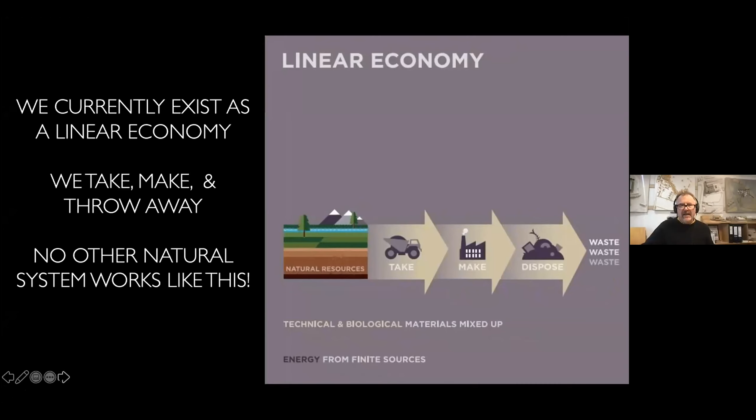We currently exist as a linear economy, where we take, make, and throw away. No other natural system works like this. Waste from one ecosystem is a resource from another. We're the only system that rocks up at a place, consumes, trashes it, and moves on, leaving devastation.

What we want to be talking about is a circular economy. In the human-focused circular economy, you've got the biosphere for all organic things where you grow stuff, make stuff out of that grown stuff, use it, reuse it, and as long as you don't make it toxic waste, it becomes compost for more organic things to grow.

Then we've got the complexities of the tech sphere, where a lot of the products we make cannot ever be compost. So that's the big challenge: designing things to be material stores for the future, material resources for the future.

This has been written about very eloquently by Michael Braungart and William McDonough in Cradle to Cradle, all about doing good, not less bad. That's a reference to sustainability, where unfortunately the phrase has been besmirched because it tends to be 'I will be less bad by 10%, I will reduce my consumption of something by 10%.' That's not going to save us.

Some of the obstacles preventing a mass take-up of circular principles: a lack of awareness of the benefits, no time to learn new ways—we just want to get on, we've got to build, haven't we? Not knowing where to start, and we're not always involved from the start, we being consultants.

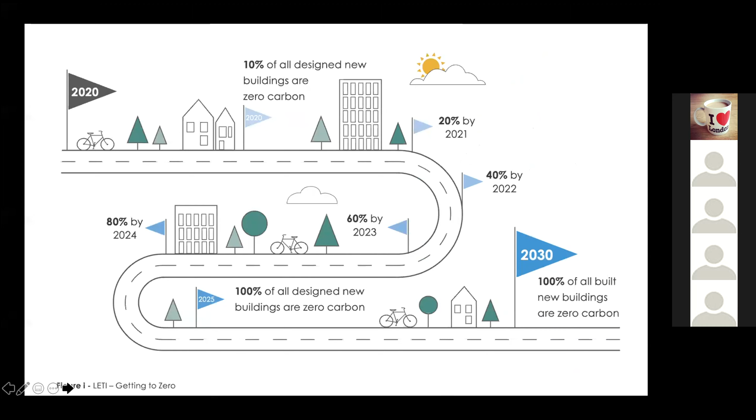We've got the climate challenge from the RIBA. We've got the amazing work of LETI and a carbon descent plan. So we've got a consensus out there, you could argue. We've got these networks, we've got the climate framework with this cross-industry action group initiative, looking at the curriculum in the academic world as well as practice across disciplines. We're sharing knowledge and working together, and we were not doing that two years ago.

People are writing about it. It's not going away. Reuse is the big deal, and that's part of a circular economy. And of course, 80% of today's built environment will still be with us in 2050, which is when we need to be at net zero carbon.

So why is it a big deal to start at RIBA work stage 0, strategic definition? Well, as Sophie Thomas said a number of years ago when working for the RSA, research has shown that over 80% of the environmental impact of products we use is determined right at the beginning. You've got to do it right at the beginning, or it's too late. It's very difficult if you don't get these ideas imbued and embedded from the start.

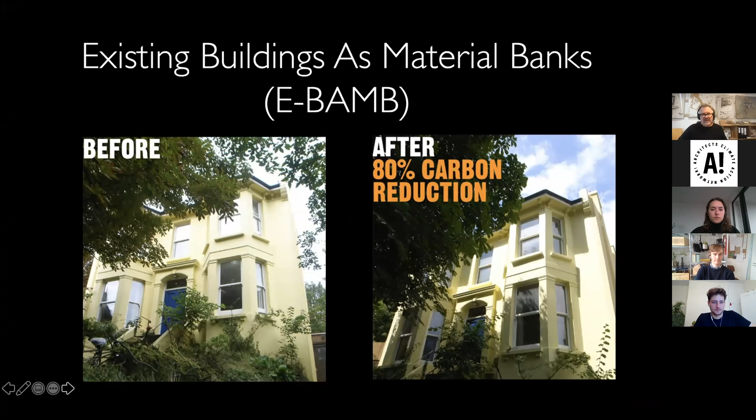So in the world of a circular economy, cities are material stores for the future. We are urban miners searching for new material sources to reduce our need for natural raw materials. We've got concepts such as Buildings as Material Banks, but you've also got E-BAMB, Existing Buildings as Material Banks. We do not need to throw anything away, we adapt what we've got.

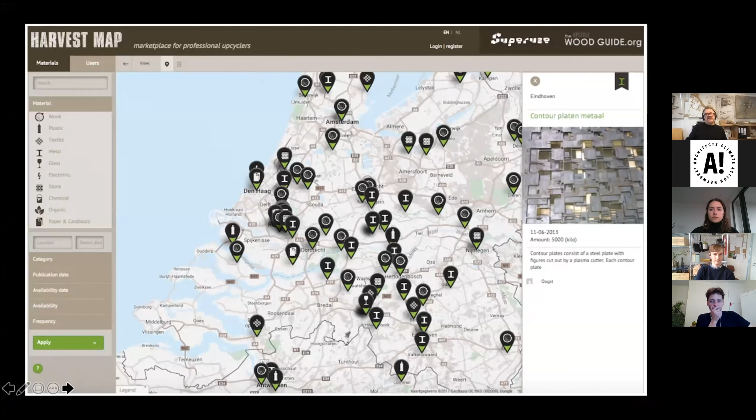We're beginning to get the digital tools and databases to support this. Superuse has famously started their interactive harvest mapping - this is in the Netherlands. This is one of their own harvest maps. They're scouting around looking for resources, which can also be human resources.

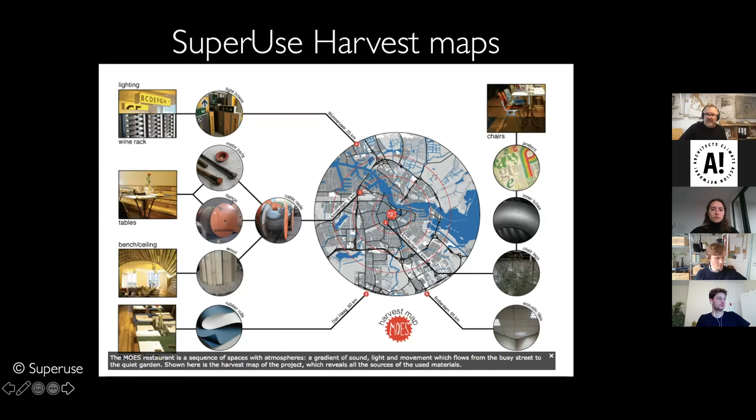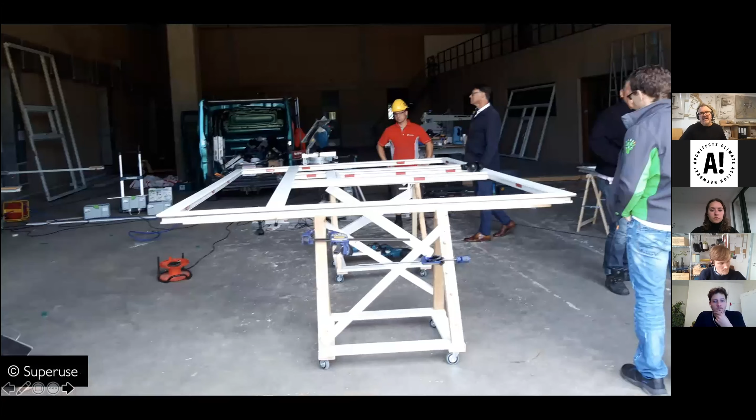And here's a recent building of theirs, an abandoned building at an airport - no great shakes really, but they're refurbishing it. What was interesting is they found 1,000 of these nasty UPVC windows being stripped out of a housing estate. They actually found a company that will strip those back, clean them up, and they've been installed in this building. So there's all sorts of things happening.

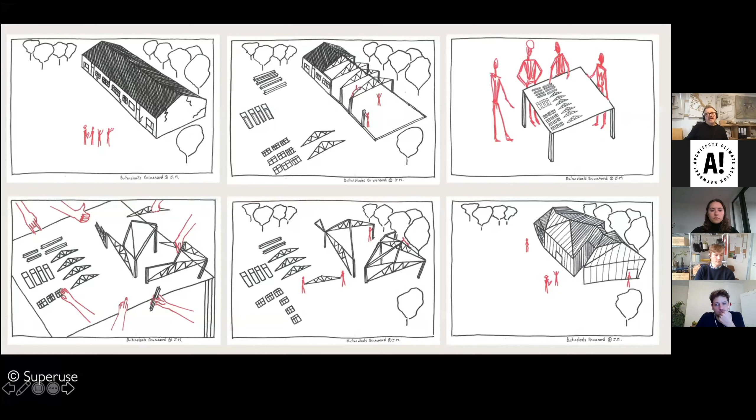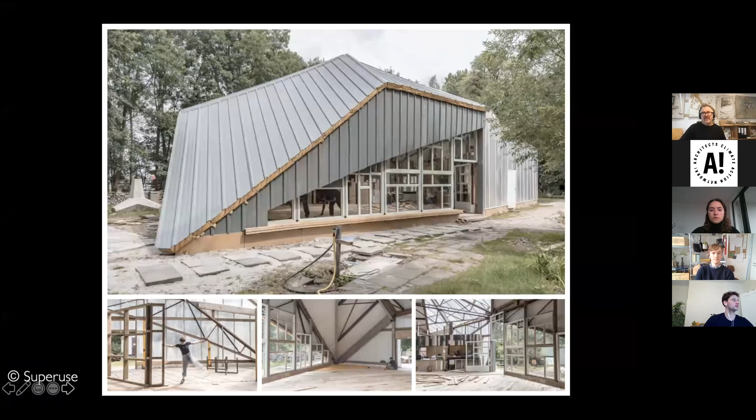They can get a disused single-story building - this is a building that was on a school site - and with children, they made a 3D model of that building which deconstructed the elements, and then the kids put it back together in a different way. So that was a nice way of engaging with kids.

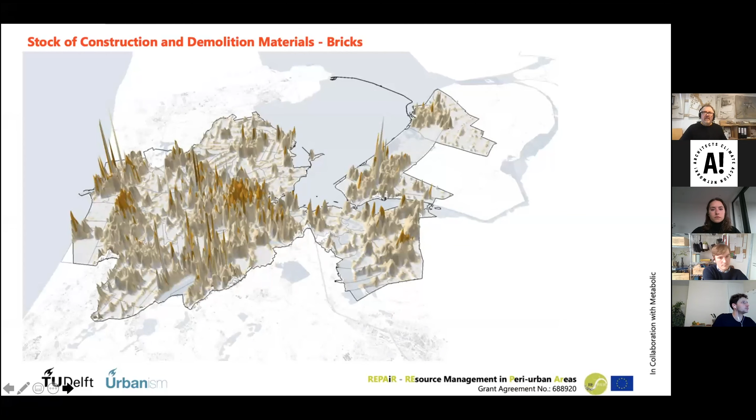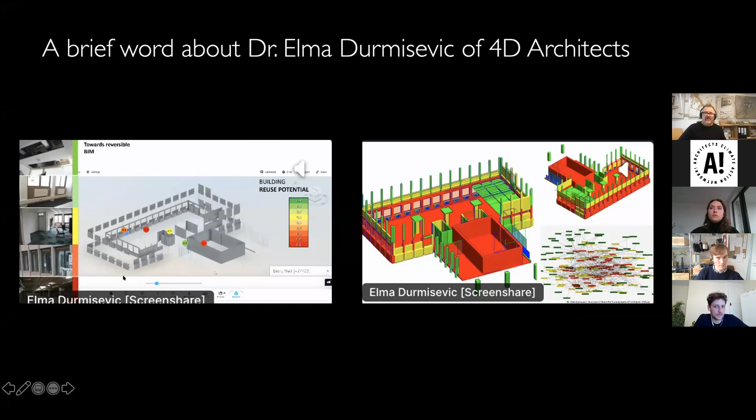This is a digital 3D resource map of the Greater Amsterdam Metropolitan District, actually quantifying the potential resources in an area for reuse. Here we've got Elma Durmisevic, an architect in the Netherlands, who has got a Revit bolt-on that measures the potential for reuse of building elements in an existing building.

MIROG, the major infrastructure resource group, last year prepared a paper presenting a case for a resource exchange mechanism. We've got an emergence of an idea here. So we've also got the physical infrastructure.

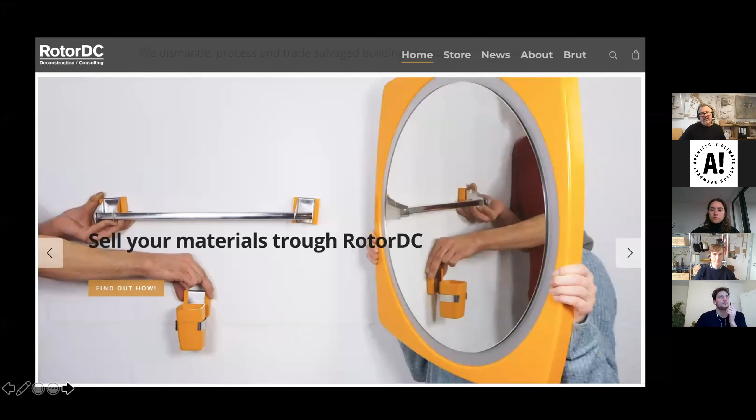But we do need the physical as well as the digital. We're working with them on a research project at the moment, which will provide a directory of 1,500 reuse suppliers across 6 European countries.

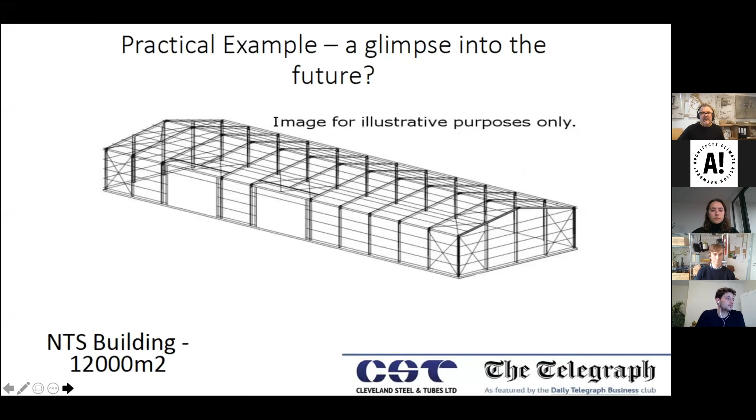Defining the business case, I think it saves money. Here's a simple example: Cleveland Steel found a building in Ireland, they deconstructed it. They needed a new building, by the way. They deconstructed this building and reassembled it in the UK. It's only a £6 million project, and they saved £1 million by doing that compared to what they'd put aside.

Here in Paris, this tower block on the left was due for demolition and rebuilding by the mayor, who had put money aside for a new tower to replace it. Lacaton and Vassal gave them their project for two-thirds of the cost by not demolishing, but adapting instead.

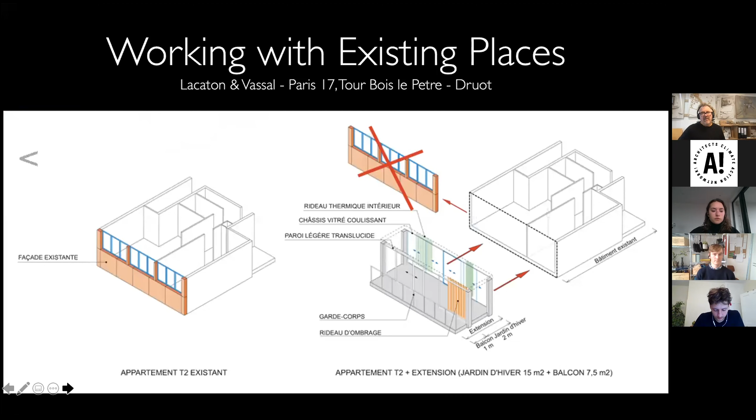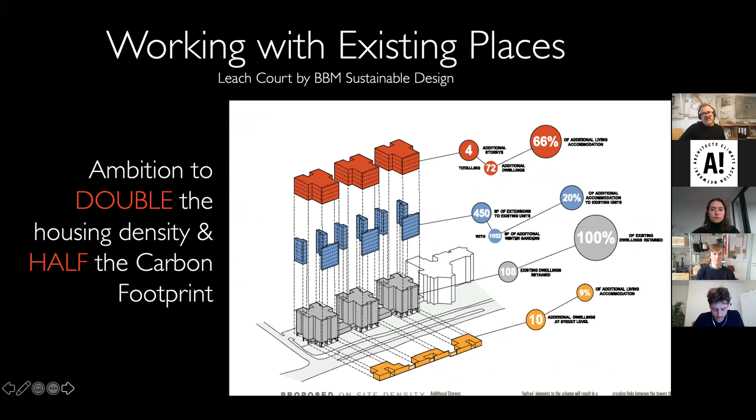We're doing the same in Brighton. Here's three towers in Brighton, our brief is to double the density of housing on site because Brighton is land and sea locked, but halve the carbon footprint, get the new stuff working hard for the old stuff. And here's the before and after.

So, designing new buildings to a circular economy. Here's a great example, the CIRCL Pavilion in Amsterdam. The interesting thing is you've got 18 million euros of circular building there, closed loop systems for energy, water, food, and construction systems and supply chain.

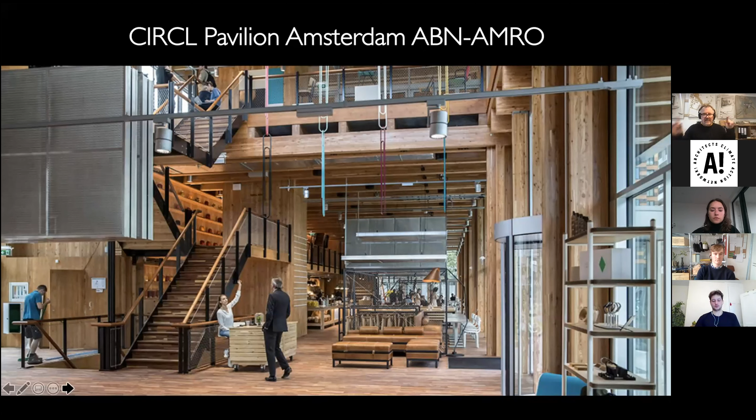What was most interesting is that the client for this project, Petra Van Heel, stood in that building with my students and I and said the ABN AMRO Bank are not only a financial bank, we're now a materials bank. So they're understanding the value of investing in buildings that, at the so-called end of the building's life, are a material resource.

So some principles: remember, buildings are material stores or material banks for the future. We're looking at material passports, information that you can plug into BIM models that gives you additional information on the reusability and provenance of materials, so you can safely reuse them one day.

There's leasing of materials, Richard's going to talk more about that. Designing for disassembly, and then trying to eliminate toxic materials and materials without an end-of-life strategy, so introducing more and more organic materials.

Here we've got a project for Glyndebourne Pavilion that's just been switched on again, where we're finding waste from the site. This is our own resource map for the site. We're looking at old bricks, oyster shells and lobster shells from the site, food waste, ash dieback, corks, glass, and we're growing mycelium insulation on site.

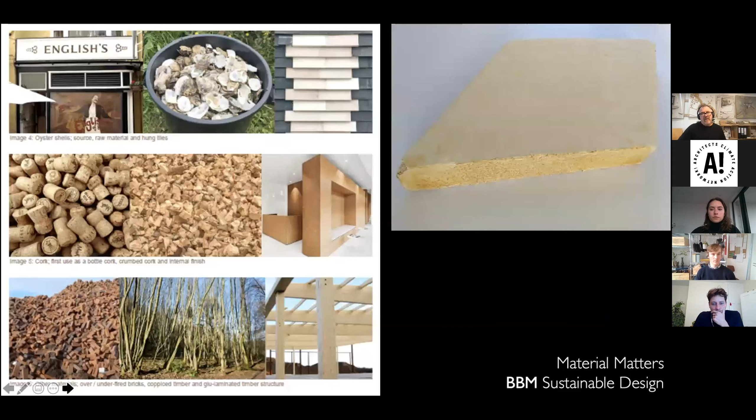We've got a lot of chalk on the South Downs, so we actually found most of these materials on site. That's the material palette for this building that's going on site soon.

By the way, I wrote a book a few years ago called The Reuse Atlas. It had chapters which were steps towards closed loop systems, recycling being the first and most basic thing through to closed loop systems. We're doing a rewrite — if anybody's got any projects, please contact me direct. We actually know what we're doing, so what's stopping you guys? And don't forget, architecture can matter.

Our biggest challenge is not changing today. Thank you, keep safe and keep well.

I did it too quickly. I said I'd run out of slides.

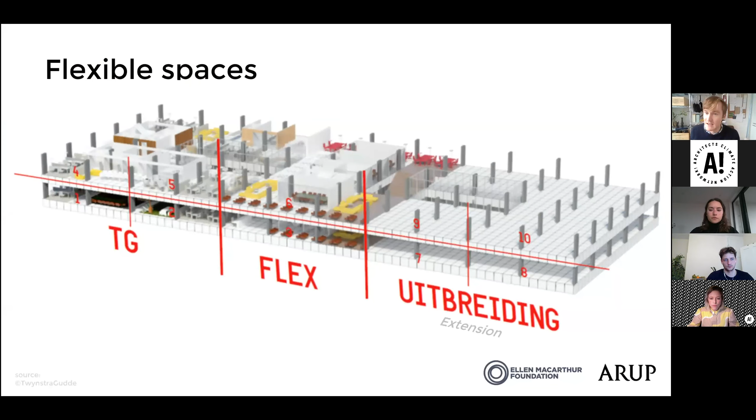Another example of flexible space: an office for a marketing agency in the Netherlands, which is an office by day and an event space at night, with the desks disappearing into the ceiling at the touch of a button. We're also seeing other consultants in the Netherlands saying we do not need the same amount of space every day of the week—so how do we give that space away to others on the days we don't need it? Trying to make occupational spaces a lot more flexible.

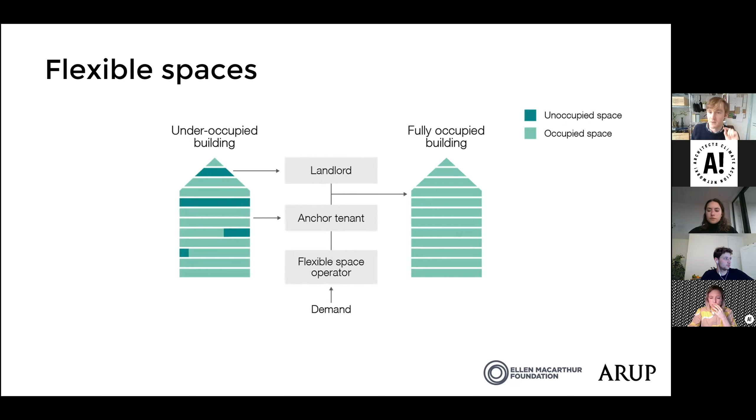So we have a standard building which is fully let, so on paper it is occupied, but we know every occupier is not occupying it fully, so there is space here that is going to waste. How do we take the demand for space, whatever it might be, startups or whatever, and match that demand to that space? At the minute, the existing landlord and anchor tenant block that demand matching process. So we propose having a new flexible space operator, someone who's able to realize value to the client, be it the anchor tenant or the landlord, by creating additional revenue streams, by renting out the space they're not using to people who need it over the short term.

Adaptable assets. So we have seen increasingly reuse is on the agenda. The new Standard Hotel in London, an excellent use of changing an office building into a hotel, provided that some people don't mind not having windows in their hotel room.

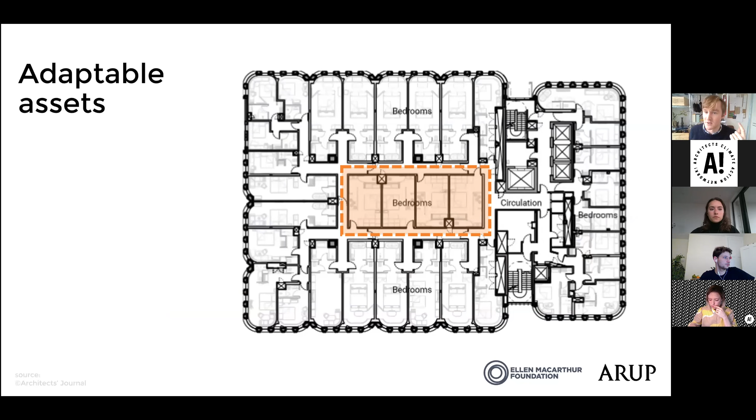So some of the forms for buildings that we use constrain the way that we can adapt them to other uses. Adaptable assets, again, Midtown Manhattan, following on from the pandemic, all those offices, are they going to continue to be used as offices, or are we going to turn them into affordable housing? What are the restrictions we put on buildings by designing them for a single purpose that stop them being changed into other uses?

So to overcome those barriers, we say, let's split the investment strategies between the bits of the building that last a long time, the structure and the skin, and the bits of the building that are function specific and short term, the services and the space plan. We can occupy a building for one use for one period of time, one social moment, then strip it back and occupy it for a different function and a different use with a different investor for a different period of time. That means we can respond to social change on a site without having to demolish a building.

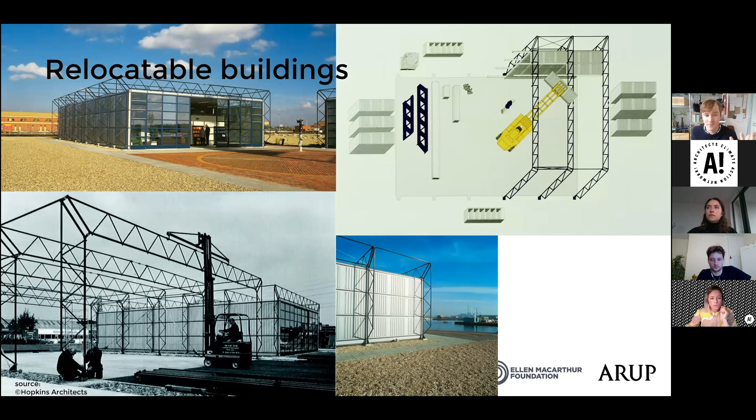Relocatable buildings. We have seen ideas for relocatable buildings coming out of architecture practices for decades. This is the Patera building system by Hopkins from the early 80s. It was a building designed to be put up in a couple of days by no more than 3 people. It could be deconstructed, it can be relocated.

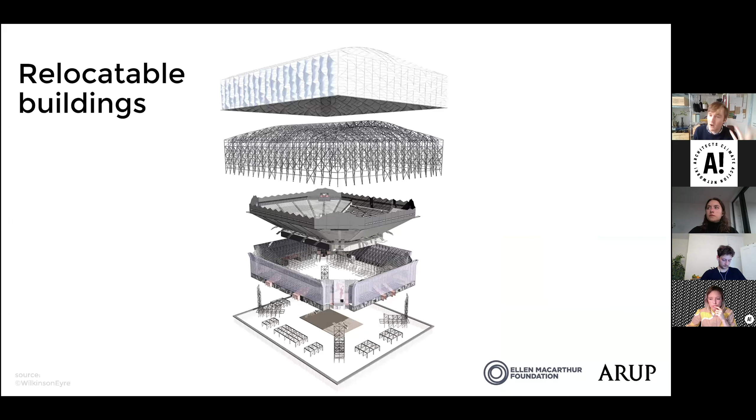It didn't take off. For the Olympics and for sports events, this is Wilkinson Eyre's basketball arena for London 2012. We have demountable, deconstructible building systems, but are they fully relocatable? This is function specific again. Its adaptability is limited.

And for festivals, imagine, can anyone remember what a festival looked like? Seems a long time ago. The co-op has a supermarket that they send to festivals. This is at Glastonbury. They put it up for the festival. It's a shop for that period of time. They take it down and move it to the next one.

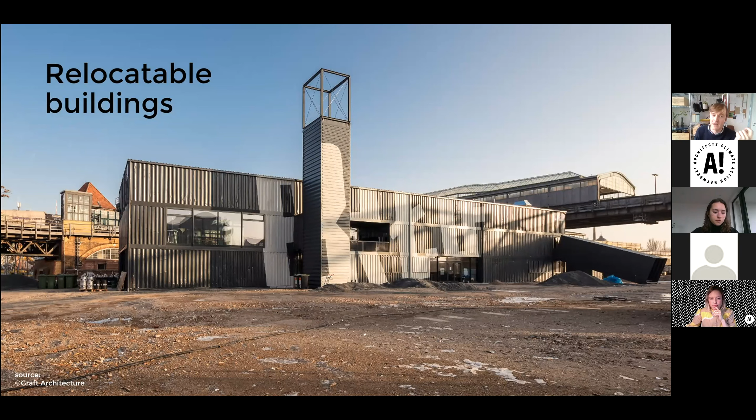So we have these concepts relocated, and of course, shipping containers. You can't talk about relocatable buildings without talking about someone making something out of shipping containers. But typically this leads to quite constrained architectural space, so not only does it restrict your design freedom, but it also restricts the business case because you can only get so much rent for these types of buildings.

So how do we take the concept in circular economy of design for deconstruction, buildings that can be taken down and put back up again without damaging the materials, to create buildings that command permanent building type rents but are also temporary? We've envisaged the creation of a new relocatable building portfolio operator, someone who owns a series of buildings that are designed for deconstruction but feel permanent, that they can then deploy onto the vacant plots in cities.

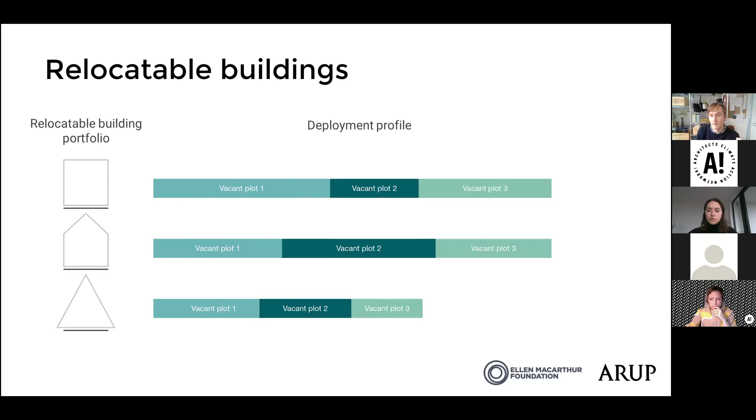So while the longer term process of getting a regeneration project goes, trundles on, and in the UK it can take decades, we can still eliminate the social blight, the economic blight associated with these vacant plots by putting buildings onto them in the short term. And these buildings then generate value, they generate activity, they generate purpose in that meanwhile sense, but they're able to be moved to overcome the barriers associated with waste and cost that a traditional method of construction would create.

Residual value - this is where we're talking about, at stage zero, how do you get a developer and an investor to agree to pay the additional money it takes to make a building deconstructible so the materials can be recovered at their end of life. At the minute, it does cost more, so you've got to make that business case at the beginning to say this is why it's worth spending more.

At the minute, there are systems for recovering value - I talked about downcycling. We tend to crush stuff up and use it under roads. Not a particularly good way of capturing residual value.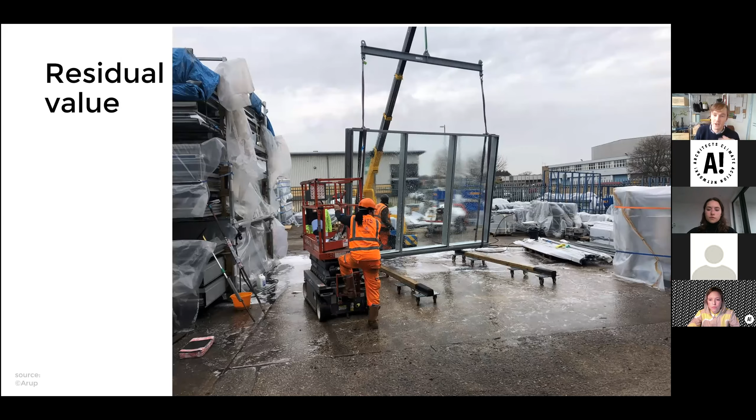But to really incentivize this, we need to make it systematic and systemic. So we said, let's create a new financial product - it's a contract, the value of which is connected to the future value of the materials in that building. The developer sells that product, and the product is attached to a materials passport, capturing the financial essence of that building's material bank - that's the point Duncan made. They sell that product at the beginning, they raise the money they need to pay for deconstruction through that sale. That contract is then traded on an exchange, just like any other financial product would, throughout the life of the building.

And at the moment the materials covered by that contract come out, the person who owns the contract at the moment is the owner of those materials, and they're able to realize the future value of those materials. We can anticipate that as our resources become more constrained, prices of materials are going to continue to go up - we've already seen that over the past decade. So the materials that go into buildings now will be more valuable in the future than they are now, and this really creates an opportunity to generate value and pay for that deconstruction process.

And if there's a contractual obligation to reuse the material or make it available for reuse, it's much less likely that a demolition contractor will have the freedom to dispose of it in the way that it's currently done.

Final model is performance procurement. I mentioned at the top that buildings do not perform the way they are designed to from an energy sense, because the incentives between the designers, the commissioners, the installers and the maintainers are not the same. So performance procurement is all about paying for what you need - it's product as a service. Instead of buying products, I'm going to pay for subscriptions.

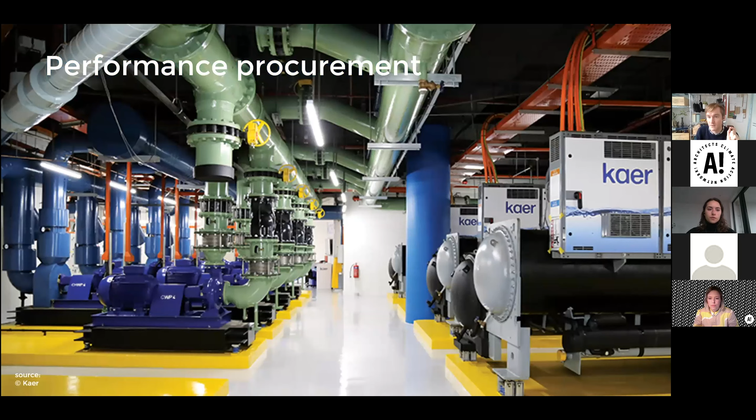They provide chilled water, they'll take over any system you have in your building. They will operate it remotely using IoT and optimize that, and you just pay for the chilled water that you use. Mitsubishi in the Netherlands - I've forgotten the exact percentage, but a decent percentage of the lifts they are now installing into buildings in the Netherlands are under this M-use concept, where Mitsubishi retain ownership of the elevators, and the person who owns or occupies the building pays every time they use them.

So we take this performance procurement model, we take the service providers, and we focused here on the skin, the envelope, the space plan, and the services - the bits of the building that determine energy use. We use IoT and digital to monitor the performance of those systems in real time, and the contract states that the client or occupant will only pay when the performance is met.

So there's a pain and gain sharing arrangement that says, when the building does not perform as it should do, I will pay less. And if you make it perform better than it should do, the supplier gets to keep the savings from the energy use.

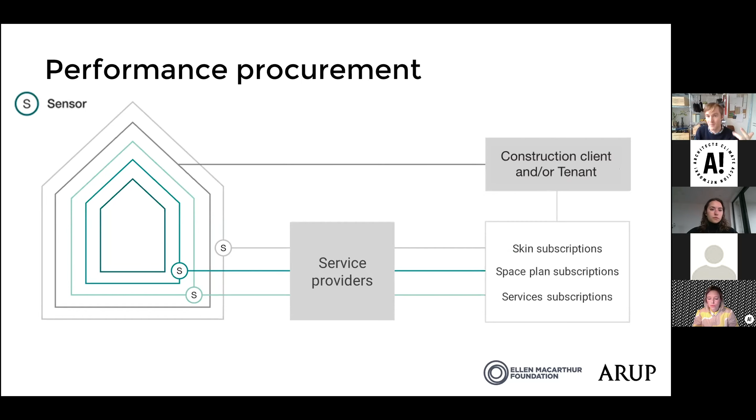And that incentivizes everybody to make sure the system is properly commissioned, designed to work well over the long term, and is designed to minimize energy use throughout the life.

For each of these 5 models, we took confidential commercial information from 5 real projects across our 5 cities, and we built discounted cash flow models for each of them. We started off with the linear base case, what's understood for now.

So for flexible spaces, we applied that model to a tenanted commercial building in Milan and found that over 12 years, it reduced the cost of that space by 18% to the tenant. Nearly 20% of the cost of taking that space was reduced because they were able to make the desks they weren't using available to others.

Adaptable assets, taking a long-term view over 50 years, making an asset adaptable and able to respond and change use as social demands change, improves the return on investment by 3% over 50 years.

For relocatable buildings, 26% is a pretty big improvement in rate of return. That's because we didn't include land use costs because they're too variable. But that 26% gives the window of profit, the window of cost that the relocatable building operator can use to pay for the land they need that's otherwise going to be derelict.

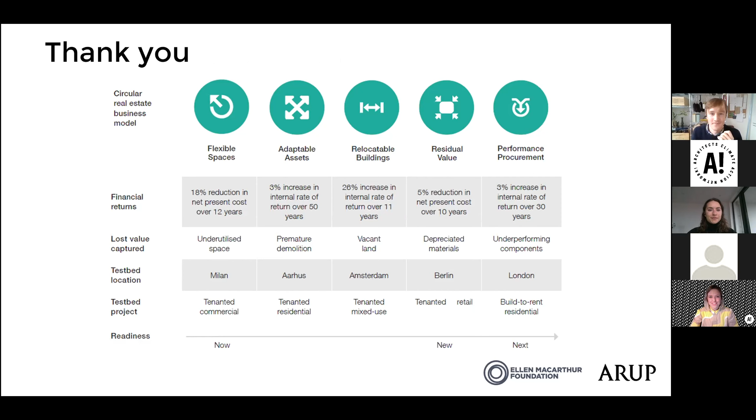Thank you very much. Thank you so much, Richard. That was really, really inspiring and thought-provoking. I'm sure we've got wide agreement with that, because there's a lot of questions popping up in the chat. So let's jump straight into them.

First question from Kieran Walker. I think this is directed to both of you, but Duncan, if you want to take this one first. How can these ideas be scaled in the context of the risk aversion of the construction industry, the need to specify certifiable and tested products for liability, and the requirement to safeguard procurement flexibility to ensure competition?